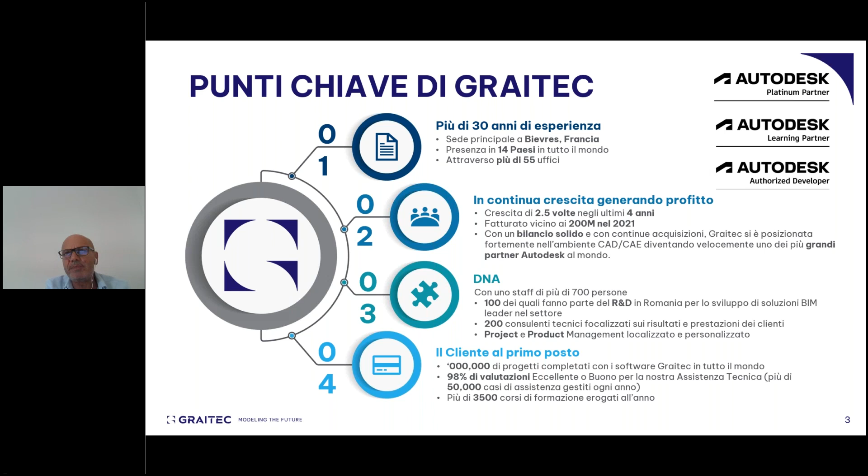Questo grazie a uno staff di oltre 700 persone, un po' diffuse in tutte le filiali al mondo, ma la cosa interessante, c'è una struttura centralizzata in Romania che si occupa esclusivamente di ricerca e sviluppo. Quindi, come dicevamo, presenza globale, presenti in Nord America, negli Stati Uniti, in Canada, una presenza europea, Europa dell'Est, precedentemente anche Federazione Russa, oggi non più. Per quanto riguarda l'Italia, il quartier generale di Graitec Italia è a Venezia, in provincia di Venezia, con filiali Milano, Roma, Napoli e Bari, con un modello di business che possiamo dire basato su 3 pilastri fondamentali: quello che noi

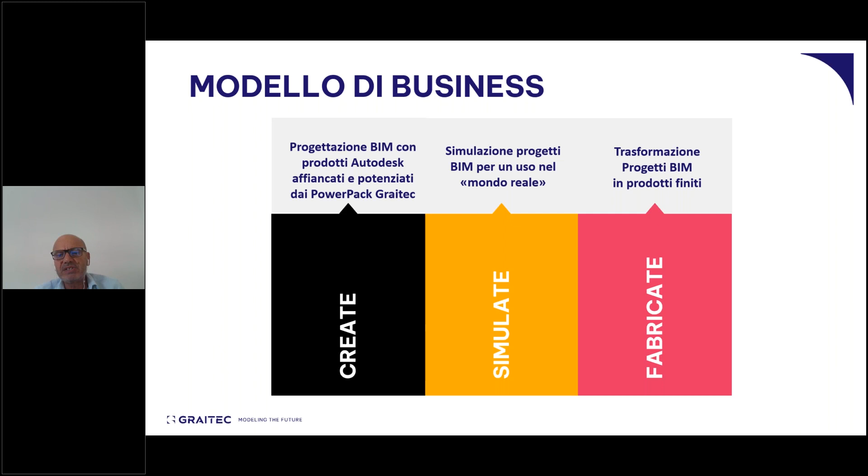chiamiamo il create, ovvero la progettazione con prodotti Autodesk, che poi sono affiancati e potenziati dai PowerPack di Graitec. Il pilastro simulate per la simulazione di progetti per un uso come se fossimo nel mondo reale, e in questo caso parliamo di soluzioni per il calcolo strutturale, fino al pilastro Fabricate, ovvero la possibilità di andare a trasformare progetti in prodotti finiti.

Ed è proprio su quest'ultimo pilastro che possiamo far rientrare Structsoft Solution, il braccio operativo del gruppo Graitec, che è specializzata in soluzioni di BIM framing, che possono seguire il flusso di lavoro integralmente, dalla progettazione fino alla produzione. Structsoft nasce nel 1994 in Canada, a Montreal. Rilascia il software MWF, che è il software basato su Revit per il Wood and Light Steel Framing, nel 2008, che poi sarà un po' anche il tema della giornata.

Nel 2013 Structsoft stabilisce una sua presenza europea con uffici a Liverpool in UK, da dove al momento poi è collegato l'altro mio collega Ben Locke, che seguirà la mia presentazione, fino al 2021, dove il gruppo Graitec acquista Structsoft Solution e quindi entra a far parte del gruppo Graitec.

Ma veniamo un attimino al tema della giornata. Perché un webinar proprio sul BIM per le costruzioni a secco? Bene, le costruzioni a secco si presentano un po' come una moderna alternativa a quelle che sono le comuni strutture in laterocemento, partendo da processi produttivi industrializzati, tipicamente off-site, per applicazioni sia in settori specifici, come possono essere ospedali, alberghi, retail, fino anche a quelle che sono le costruzioni ad utilizzo civile.

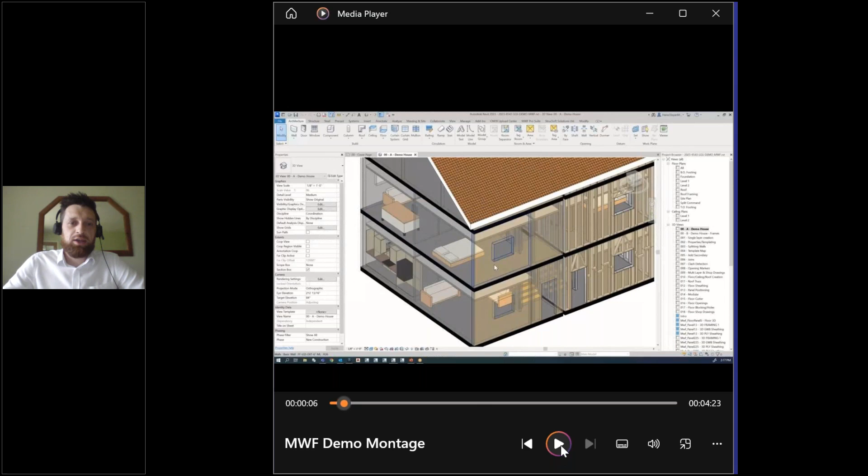So what we're looking at here is a generic model in Revit. One side, which you can see here, has already been framed, and the other side has not. So what we're going to do here is just show you how quickly and easily you could effectively frame an entire project using MWF. The members here that you can see framed are normal Revit families, so they can be modified, and you can of course create and import your own.

So what we can see here is the left-hand side of this building, this small residential development, has not been framed. So we have highlighted these walls, and we're going to frame those using the quick create tool. This is matching Revit wall types with framing types that we have dictated, so that it will frame it as we expect in a templated manner.

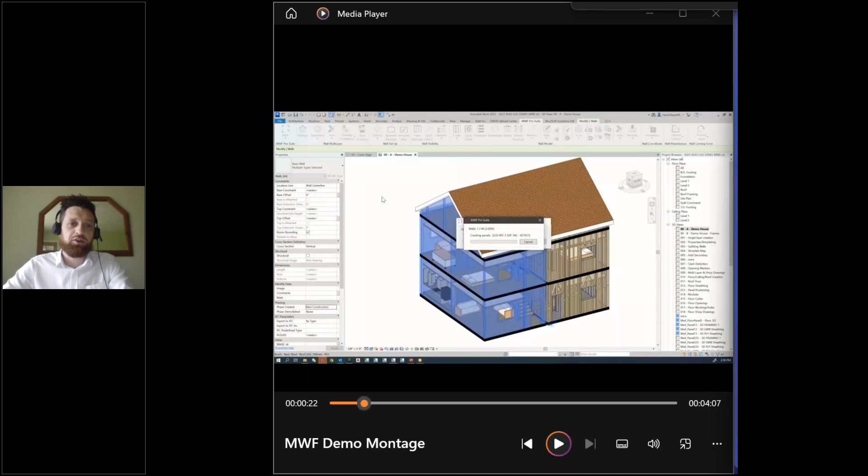So this is while that happens. This has been sped up just to keep this video nice and concise. We didn't want to do an hour or so demonstration of the software in depth.

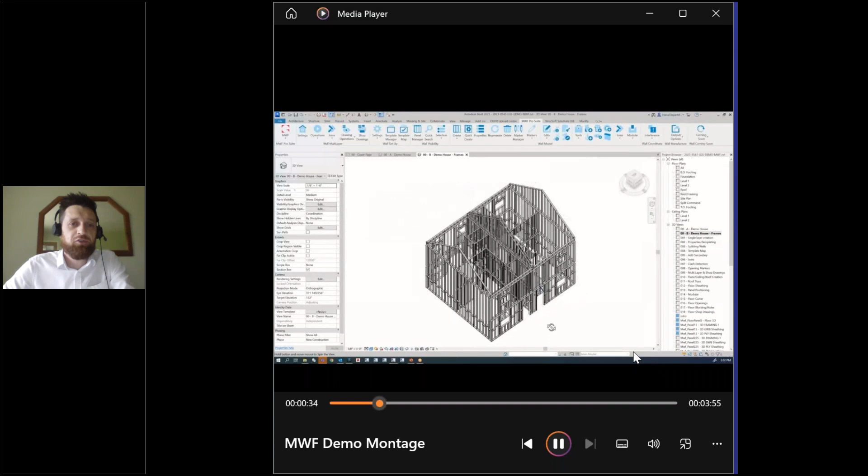As you can see, automatically with a click of one button, it's framed the left side of that project. Now what we're going to do is take away some of the views so you can see just the framing elements. What's important to notice is that whilst the entire project has been framed, not all the walls have been framed the same. On the ground floor we have vertical studs with staggered horizontals, whereas on the first floor we do not have any horizontals. We have different header configurations for the windows on the first floor versus the ground floor, etc.

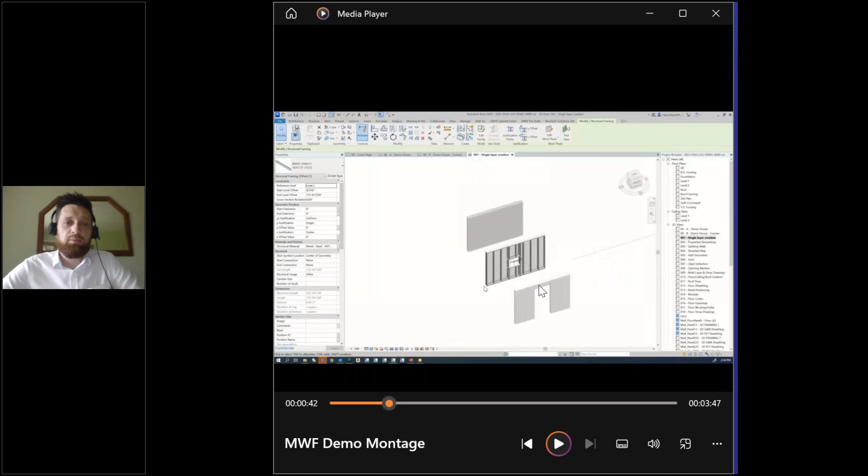So effectively what that means is you can create a whole project very quickly. Imagine the difference that makes versus framing that project manually. It matches up wall types with the templates we've suggested and frames them accordingly, taking into account joins, openings, etc.

The next thing I wanted to talk about is how well MWF copes with things like design changes. So here we have three basic walls. You can see one has been framed already. This middle one, what we're going to do is show you how it copes with changes.

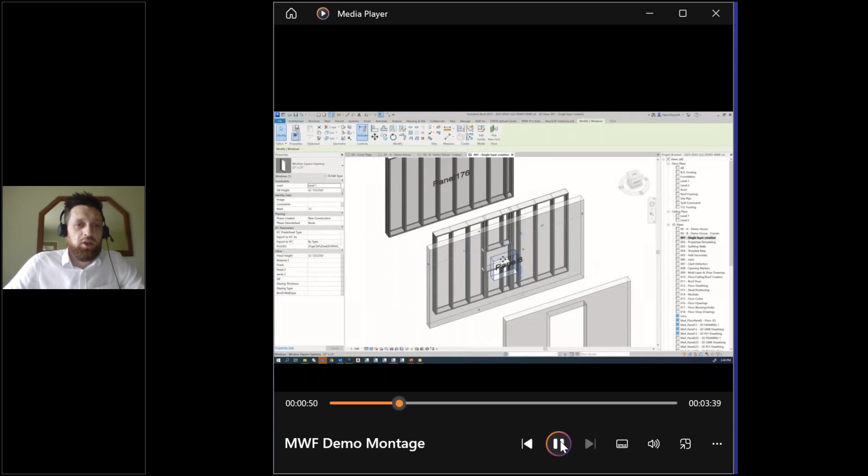We've changed the length of that wall slightly. We're also going to move the position of that wall. The window opening has moved, and actually the wall has changed shape entirely. We all know design changes come in sometimes when we're halfway through a project, and that can be quite frustrating and involve a lot of reworking.

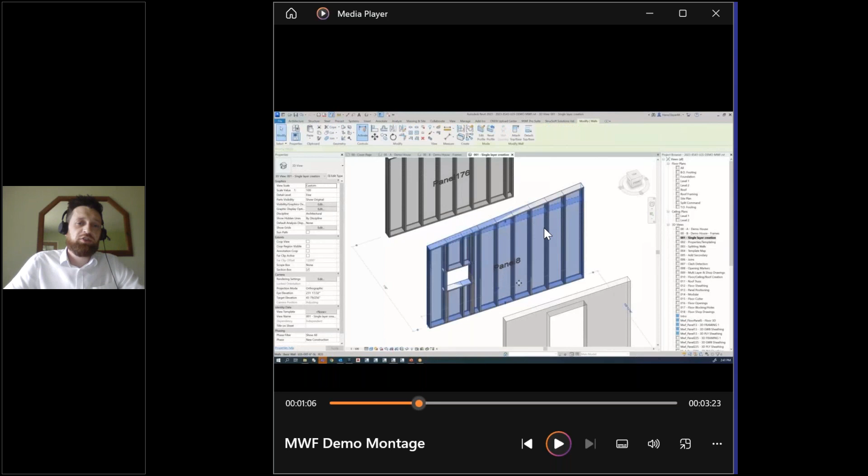In this case, as you'll see, all of those changes have been made to the wall. We simply regenerate that panel, and MWF will reframe that wall, taking into account all of those design changes that have been made. So it's now a different shape, a different size, a different position, and the opening has been moved.

MWF works really well with all the opening types within Revit, to be honest. What we can also do here is add a door opening. Just hit regenerate, and that shows again how quickly and easily it can cope with that change and addition.

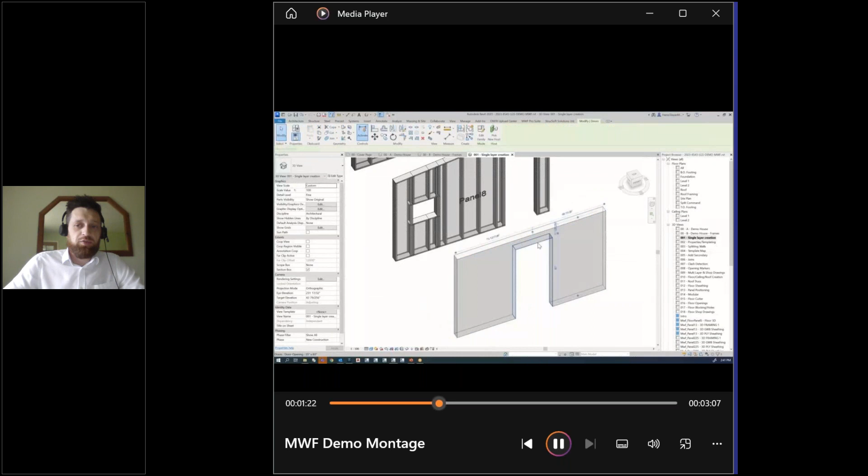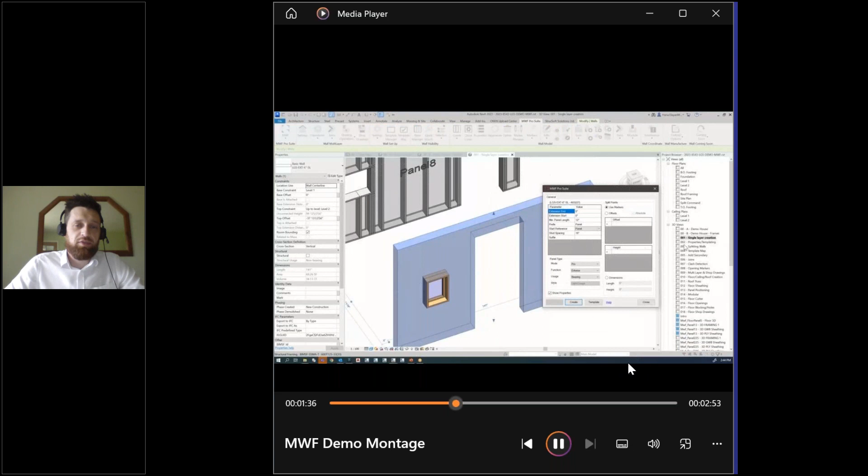We're going to look at that again for this one. Some of the openings are window openings, so we'll add a window to this wall, and we'll add another wall opening here as well, which could be a duct or a beam pocket, something similar. Obviously the need now is to frame around these, and as you can see, very quickly we will be able to frame around those openings automatically with the configuration we have selected. There we go, so that's nice and framed, again supporting that duct or beam pocket.

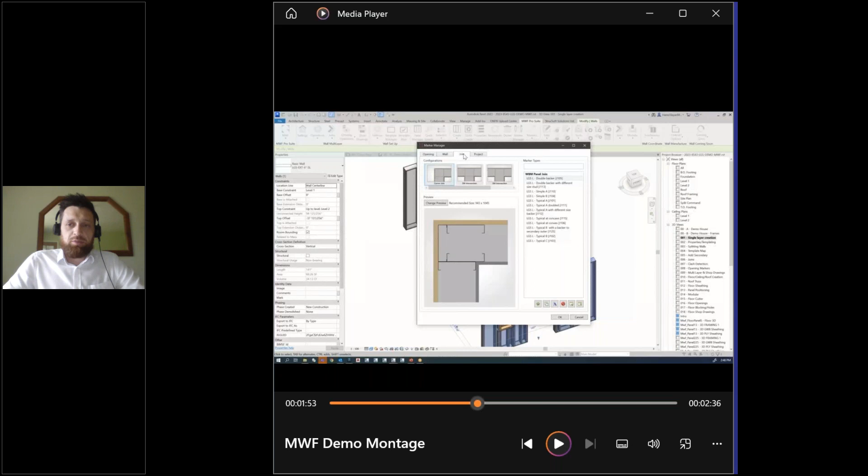What we're now looking at is some of the templates. This is how you're going to apply a template to frame a wall. It's also showing the joint conditions and some of the opening conditions here - you see different headers, different bracing, etc.

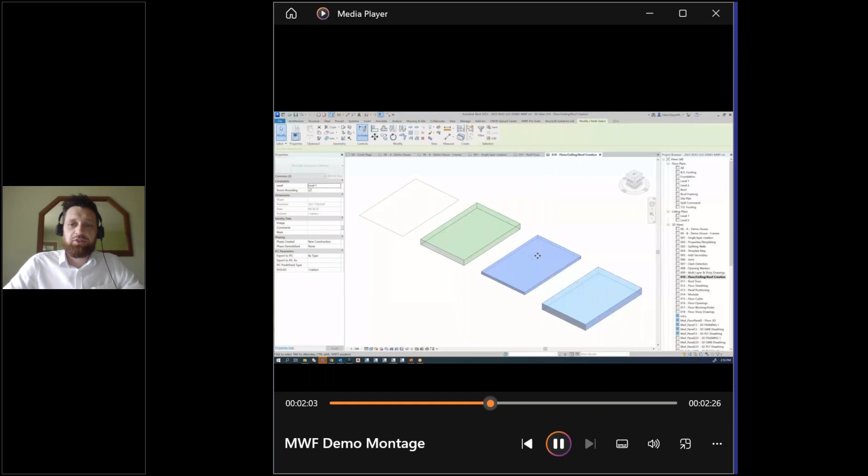MWF also comes with other modules for floors and roofs as well as walls. So you can do ordinary floor cassettes or alternatively truss configurations. This is going to show you the very same principle - it will frame floors, cassettes, and create trusses as well.

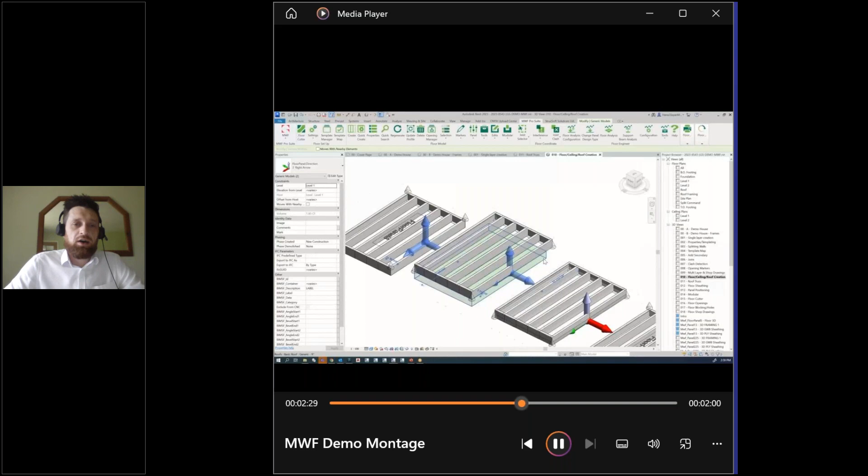Now the next thing we're going to look at - we've looked at how we apply a template, sorry - is how you would create a template to then apply to different parts of your project.

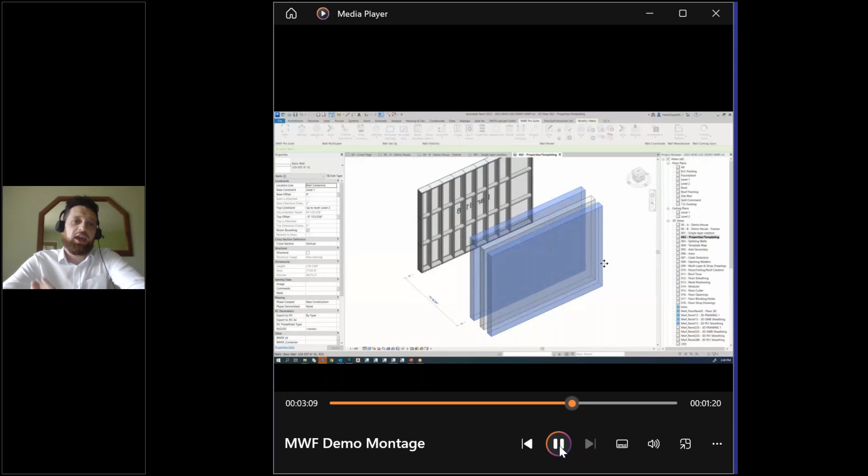So here we have two walls. We're going to create some vertical studs on this first wall, as you can see, and then we're going to add some horizontals to that as well. We've replicated another plain wall down here three times, and we're then going to just use the template we've created for those settings to reframe these three walls as well, showing you how easy it is to duplicate and use the same settings across your project. As you can see, three more panels created with exactly the same framing conditions and setups.

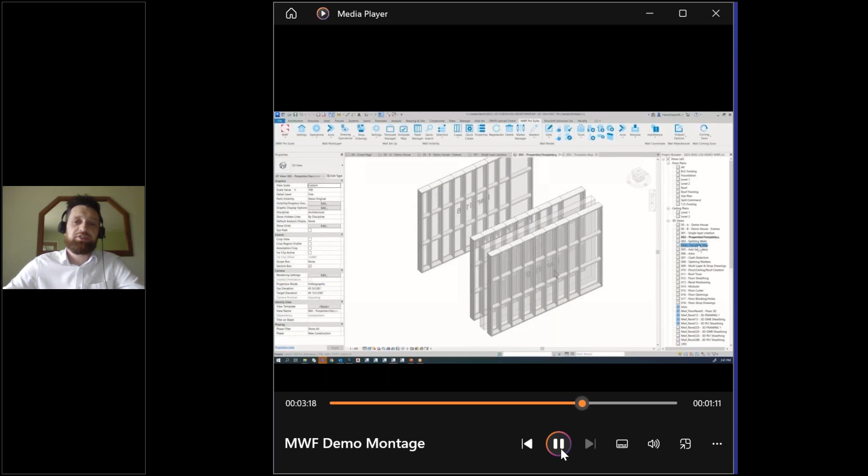As with the first example I showed, this demonstrates how easy it is to frame walls simultaneously that have very different characteristics. We've got 3 walls here, we're going to highlight them all and quick create. This maps our template, mapping wall types and framing styles to the walls we can see here, giving us 3 very different configurations.

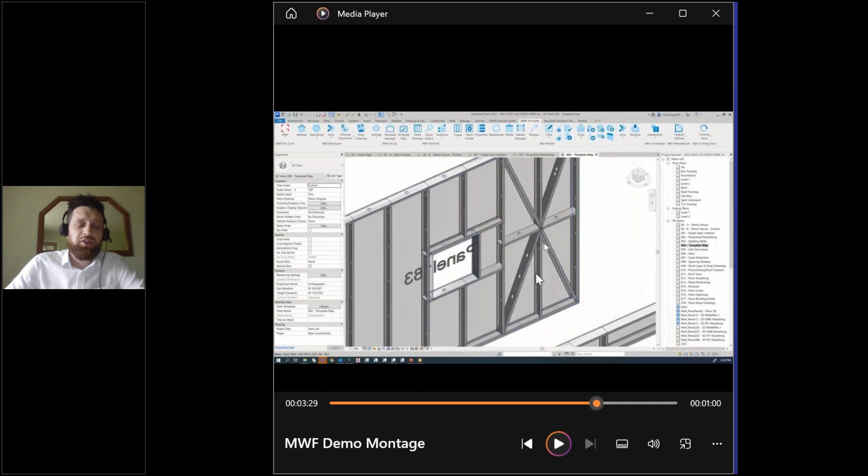The first wall here includes some holes - could be for MEP, for services, for pipe work, or anything like that really, all user defined, and you can select exactly where these would appear. This one has also got some X-bracing on the side of the panel, and this one has staggered horizontals with clips. We also have tie downs that you can put in as well, all configured automatically with templates.

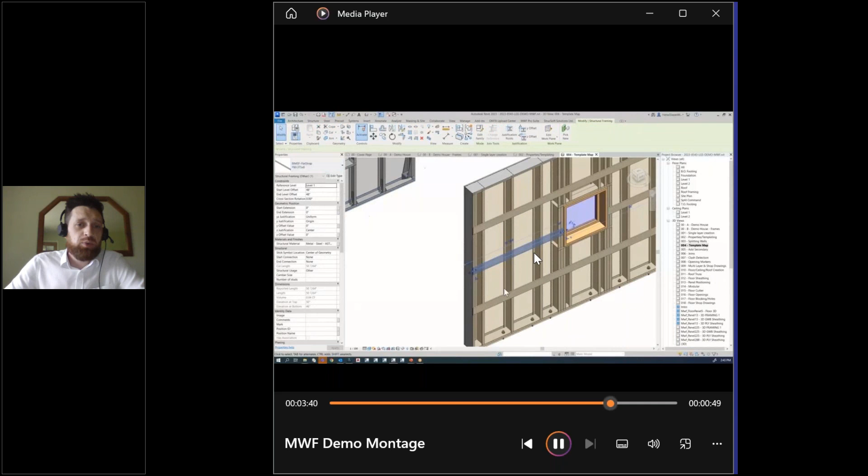And this one, as well as the additional anchor bolts, has horizontal furring on it as well. Hopefully that shows you how easy, with a click of one button, you could frame very different walls with very different characteristics throughout your project.

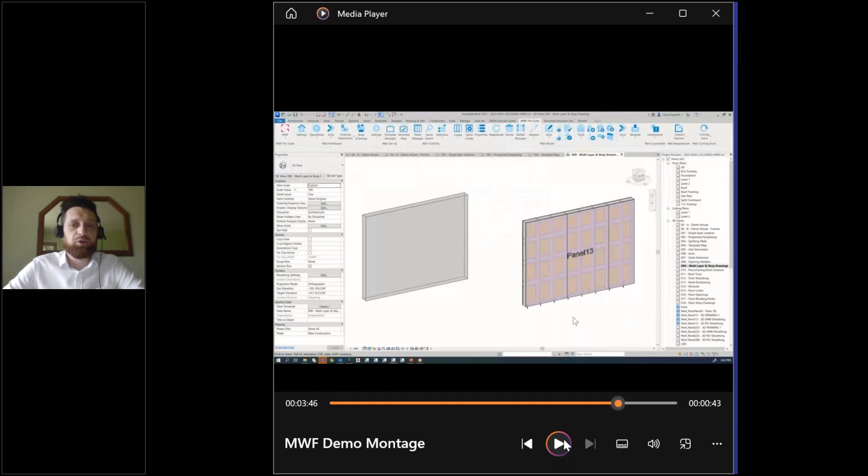MWF is also great with other wall layers and sheathing layers, because it's not just the framing we need to do - there will be lots of other layers. This could be OSB, plasterboard, plywood, any of your finishing layers really. MWF will also automate the placement of these boards. On the first side of the wall we could see that was vertically laid, and on the other horizontally - lots of options to configure and optimize however you wish.

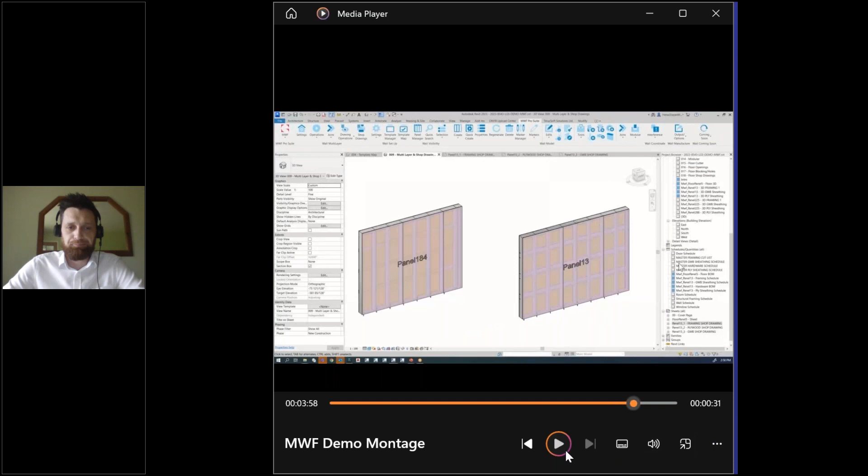Once you've finished these designs, one of the crucial parts of MWF is workshop drawings. These again are highly configurable, all user-defined. We can see here we have different views - a plan view, an elevation view, some schedules with cut lists, labels on the members, as well as dimensions. We can also include bills of materials, schedules, cut lists, with all the other clever things Revit will allow you to do.

With the benefit of being a Revit plugin, a lot of the other Revit features are still very usable, so you can create a lot of useful information and BOMs from this. What we can do with the models, once created in Revit and MWF, is export these to our CNC and production management tool called Onyx. Within the Onyx platform you can manage logistics, sequencing, stacking, and even get CNC machine files.

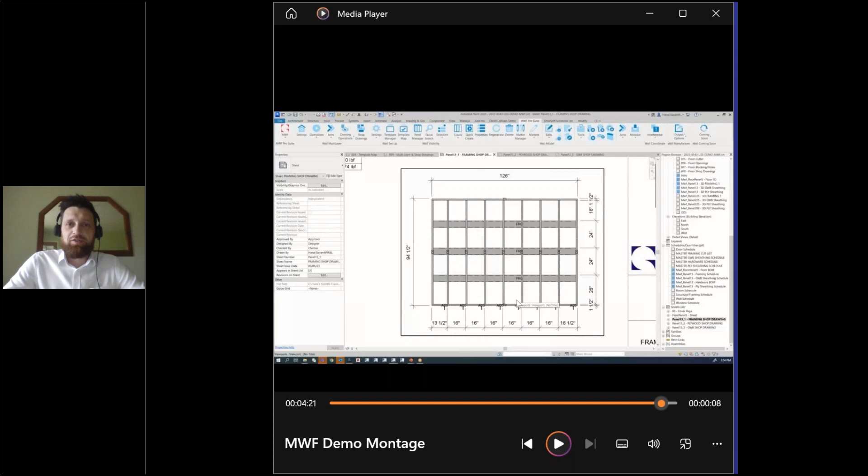We work with all of the main manufacturers, such as Howick, such as Scottsdale, and I'm sure you know the others - we're able to get files for those machines very easily. I appreciate that was a very quick demo, 5 minutes, to say we could go through this for hours. But anybody interested in looking at this in more detail, I'd be more than happy to support with extensive demonstrations. We can offer trials, and are happy to work on proof of concept projects, to look at how we can recreate your specific design details.

That's all the time I wanted to take up with you today. Hopefully I've talked slowly enough and not given too much detail - that shows how the product can be used at a basic level.

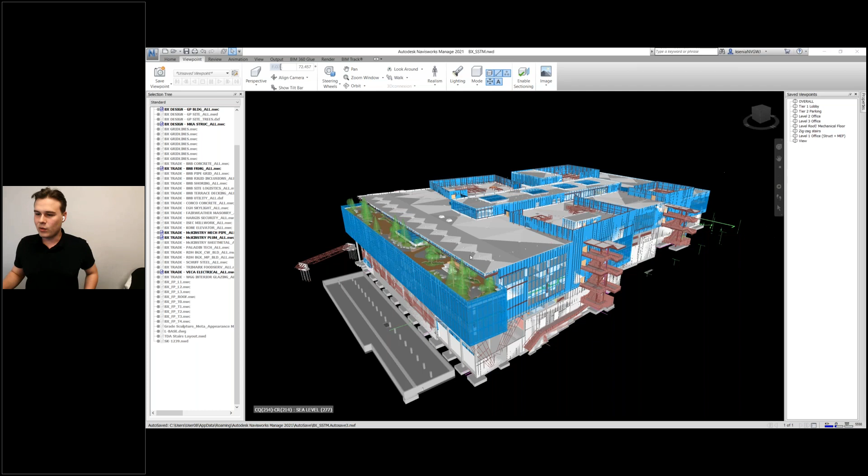I'm going to share my screen real quick on this building. It is pretty huge, wonderful, interesting forms. We have been using MWF since 2020 starting on this job, and of course everything redeveloped and readjusted to be extremely efficient.

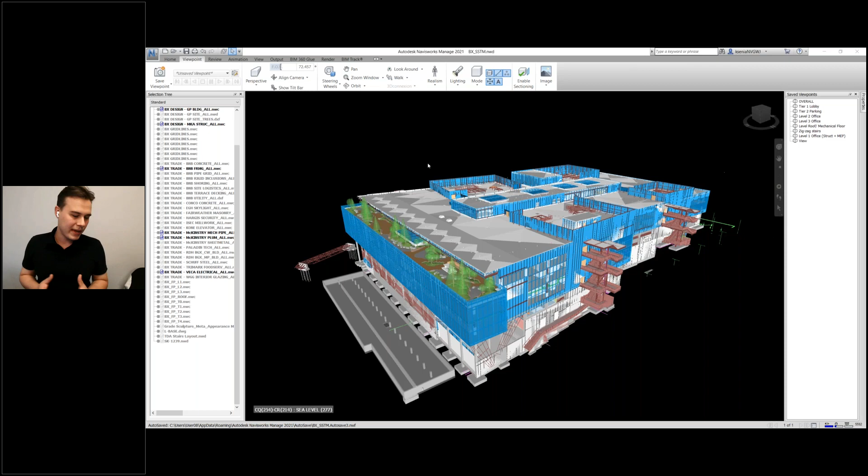This building particularly had, I think, about 3,200 panels that needed to be panelized and brought to site already prepared. The main idea was that you would actually do the coordination ahead of the montage. Let me share real quick here on some of these panels.

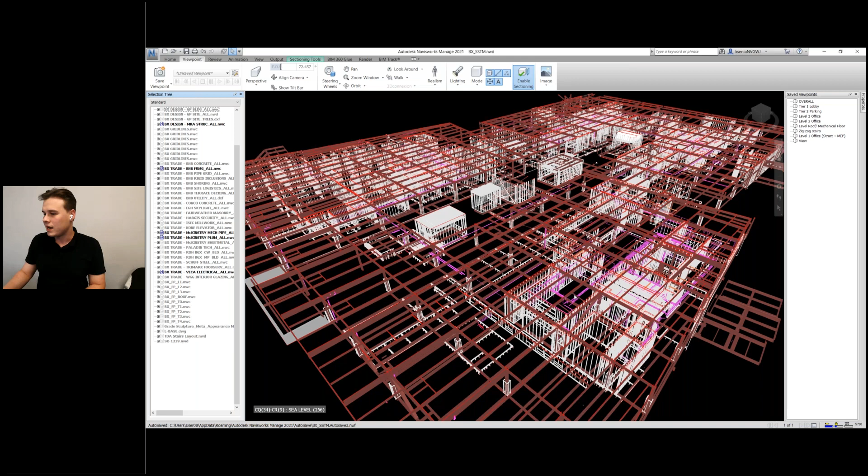So here's all the meat around the bones. You can see right here that there are a lot of different services happening, a lot of electrical, and all of this was actually coordinated to the extent of what was needed for the construction.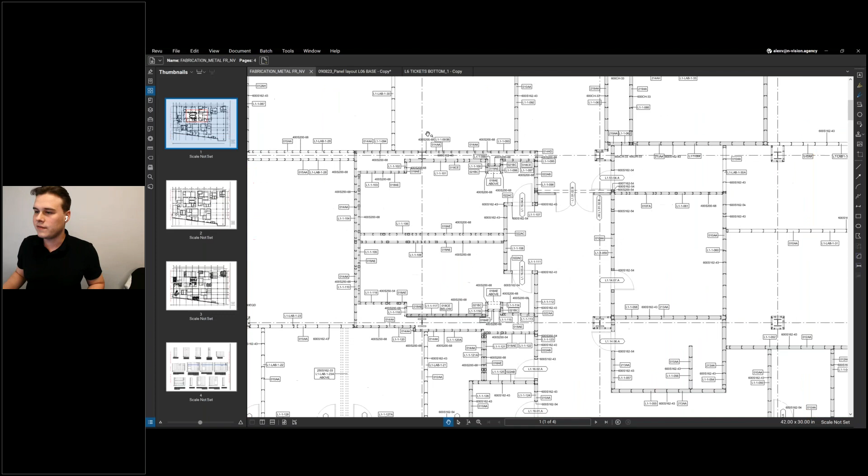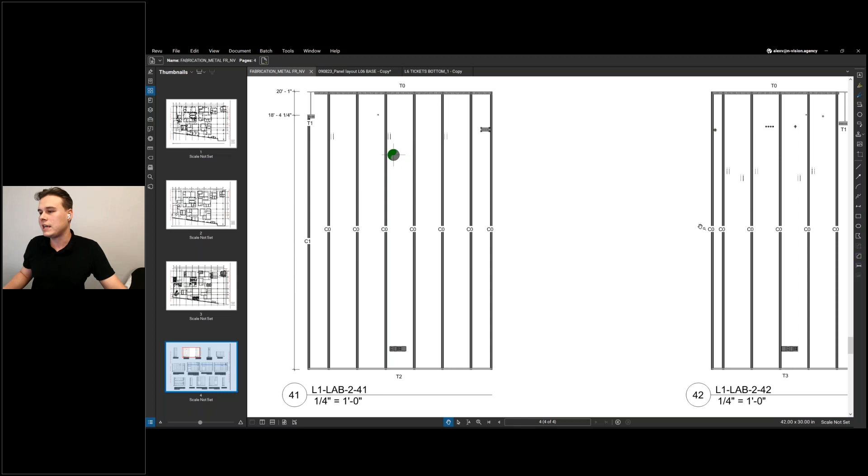Once everything is done and the engineering is approved, we produce the shop drawings laid out on the floor plans. Typically, we assign a floor plan, the wall panel number referring to the level, then the number of the quadrant, and so on. The idea is to link this number to the elevations and coordinate around the MEP systems, which is, I'd say, the most common thing that would destroy your project budget if you don't take care of it beforehand.

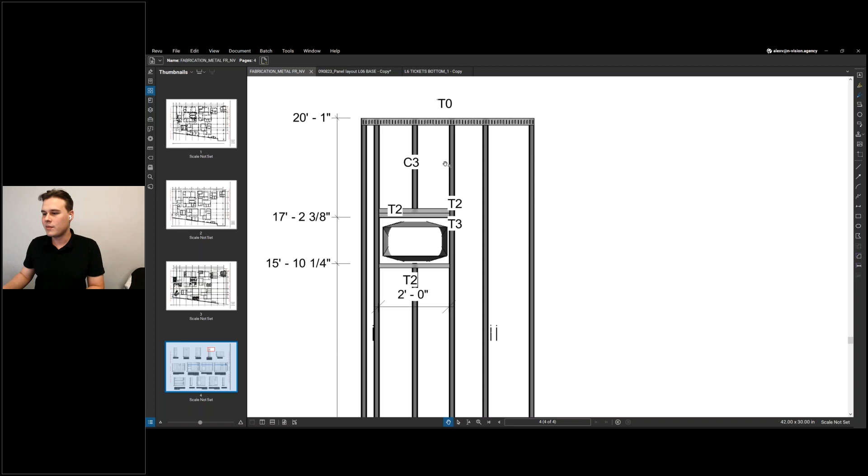Jobs that are not using clash coordination are already losing at least 40% in change orders that happen in the field. But with using MWF, the subcontractors are able to save even more, because not everybody is modeling the framing. This is the major problem, especially with the systems running in the actual wall.

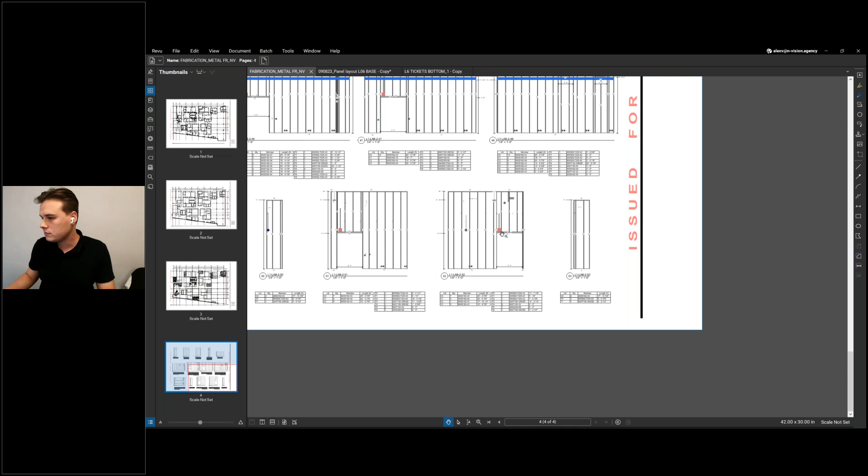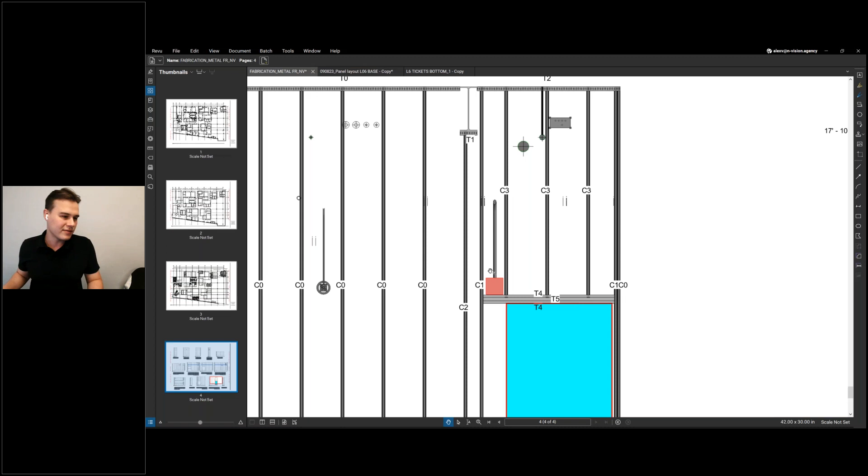I'm going to show you an example of why it's important. For example, there's a door that is this wide, and whenever you have a door, you need a king stud running from bottom to top. If you have a system there, like this junction box, you would be hitting that. In these cases, if you multiply it by 3,500 walls, you'll have so many problems, which just snowball.

I'm going to show you an example of one of the clashes that could happen in the field. So here's our ceiling, and we have an HVAC duct running through that.

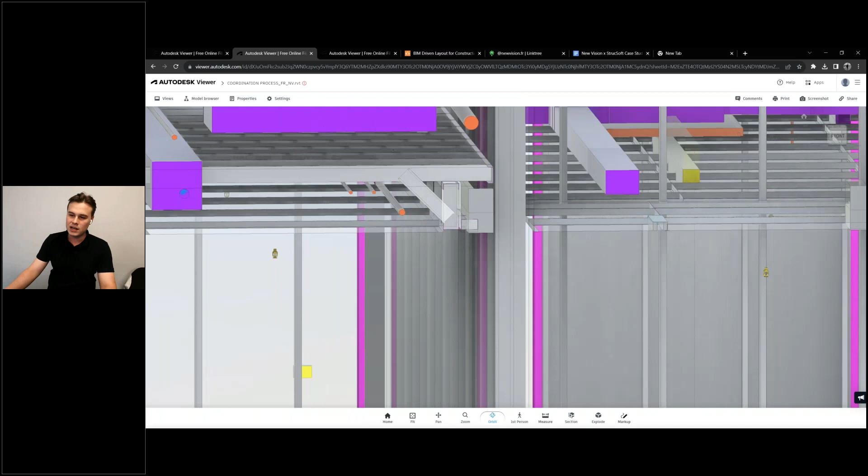That's a major problem, it is a design issue, and this caused a lot of rework. This is one of the Apple jobs, which is to remain nameless, but it is an example of that clash issue.

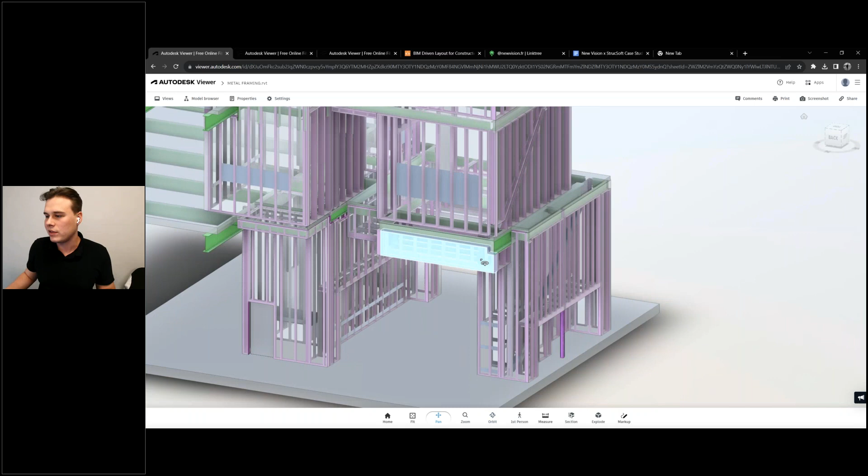We've been using MWF not only for regular framing, but also for some design decisions. For example, if you have a lot of systems happening, it is able to frame around those bracings and actually save so much time. I would probably be crying if I had to do that manually.

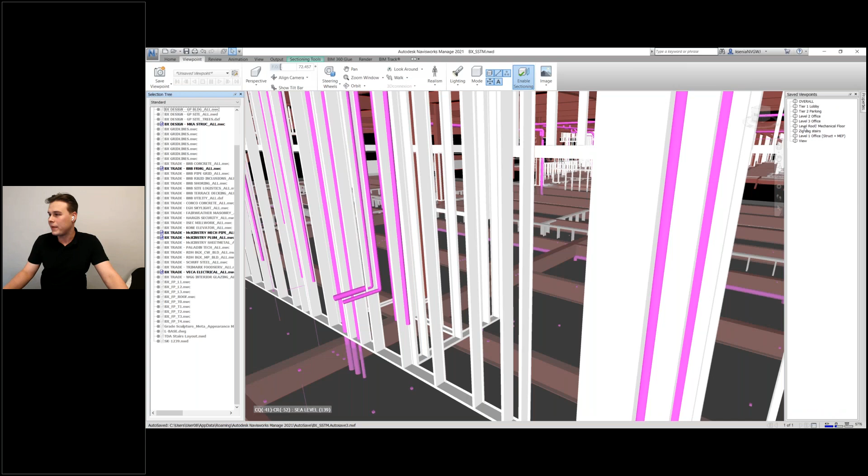We've actually tried to estimate that. If we could complete the building of Meta just by doing that manually, I would say it would take more than 5 hours per each wall. Typically on US jobs, you have coordination changes that happen every day, and reframing things would take hundreds of hours, and human mistake would be the major issue.

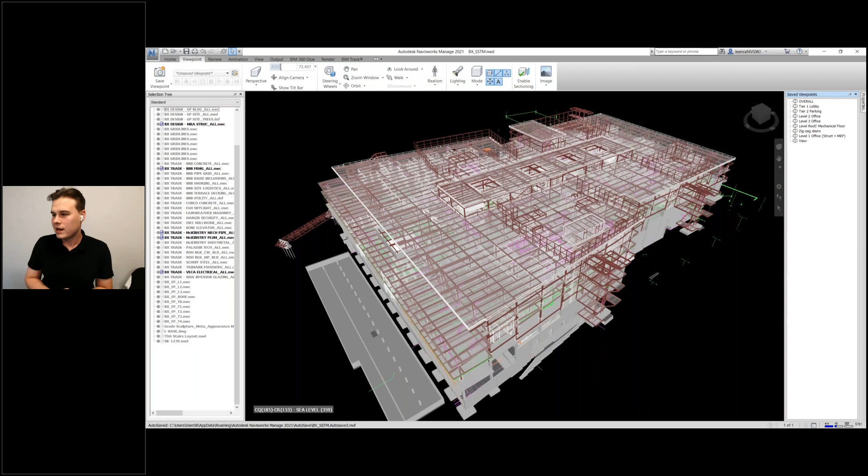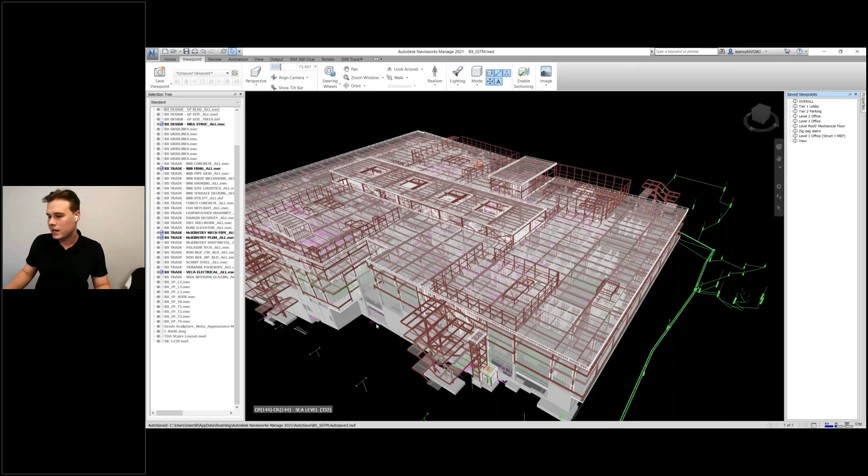As far as the shop drawings, this is the major thing that happened to this building. Technically, this particular building took 250 sheets to produce, but we are using the MWF tool right now on one of the newer jobs. Let me show you really quickly how it's done.

You can see the application of having the actual list of materials under each wall, so that you can bring it offsite, fabricate it, estimate the amount of money you want to spend, and order it ahead of time. The best case scenario is if we do everything automatic, and this was the case study we just completed.

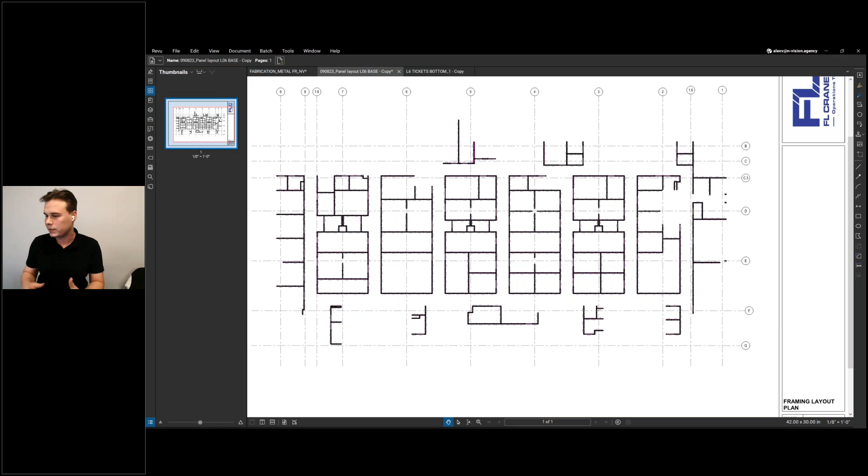It is done, it was done on September 8th, and it was completed in one week. We have completed more than 694 panels, which is much better, because the previous building I showed you took, I think, since 2020 to build, produce, and design — a year and a half. So in 3 years, I would say MWF has increased the efficiency and the abilities to do this.

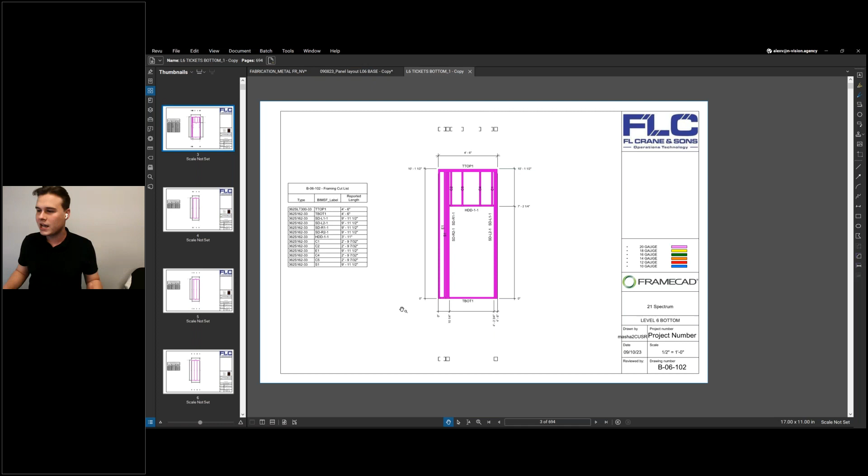Whatever you see on the screen right now is all automatic. There is basically minimal input from the detailers and designers to make sure everything is up to par and up to standards of the engineering on the type of stud. You can see all of this.

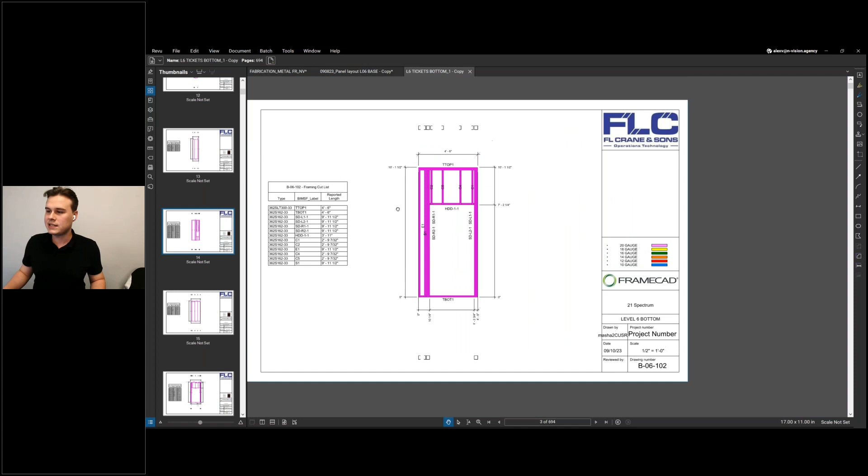One of the most interesting things is that whatever is framed with MWF can actually be used to do the robotic layouts on a field. I'm going to show you a quick example of this right now.

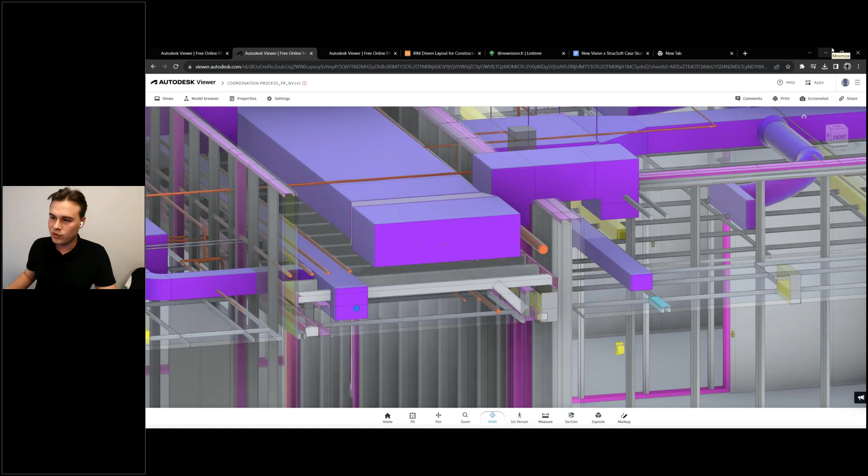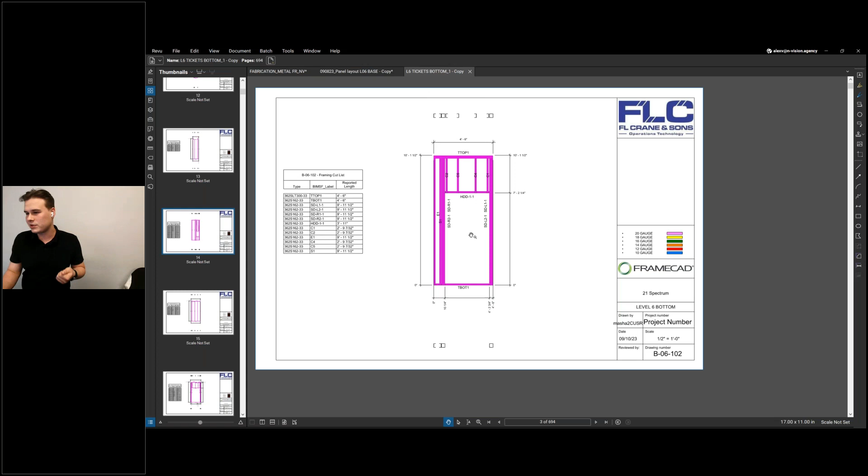Whenever you have the information about the size of a truck and the amount of those trucks, you would be able to efficiently stack them in proper places on the field, so that your workers could just come in, take this particular panel that is pre-manufactured, and put it into place, which is pretty interesting.

I want to do that. I'm going to let everybody know once we submit it and if it works well. But I do believe it's a wonderful solution.

I would say that I have a little video to also illustrate how we typically use MWF on the MEP coordination. Here it is — it's pretty short and explains wonderfully.

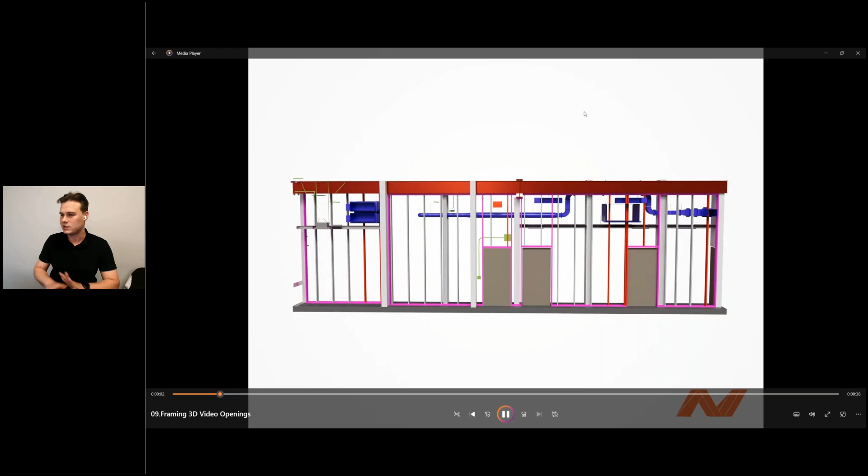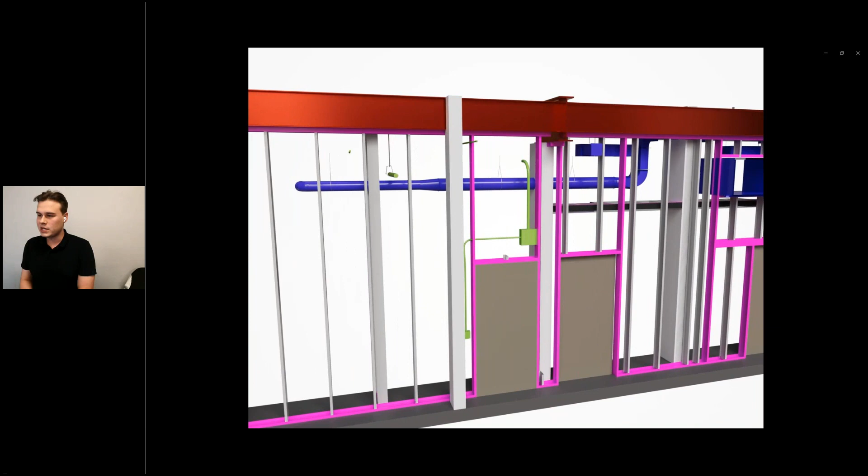Whenever you have the systems, there are different types of tolerance that you would take. US jobs are a little bit different than European — European would have a little bit less electrical conduits involved, and there will be fewer problems with the flex ducts. But at the same time, it's important to think ahead about the primary electrical runs getting into the building, and to create the openings for this. You can see that.

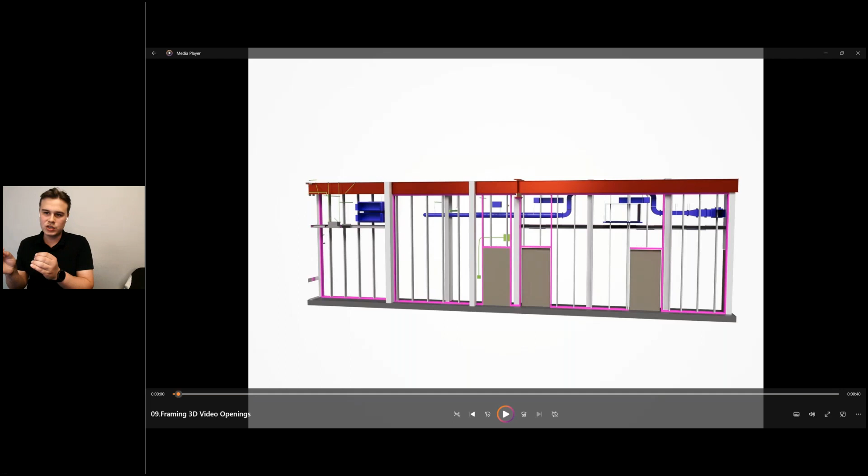So whenever we have MWF, of course it does everything automatically, but there is a really nice solution that allows you to plan ahead the spacing of the panels.

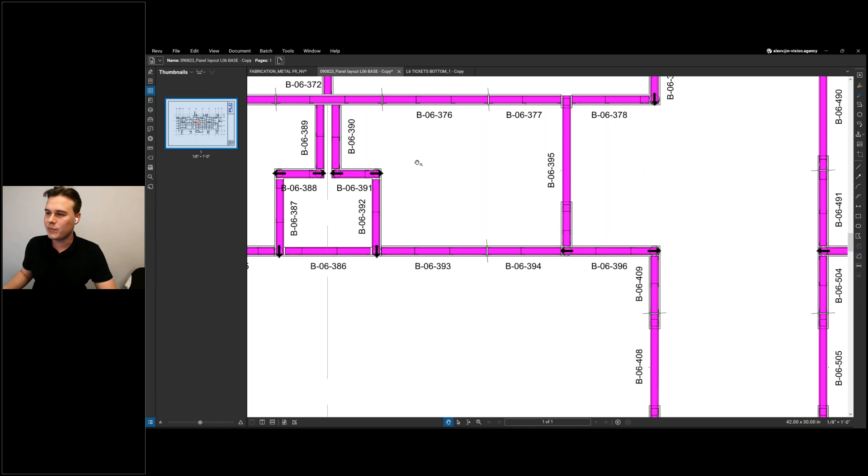I'm going to show an example right here. You can see that some of the panels are cut into place, first of all for logistics. Secondly, there are control joints that need to happen to avoid the deflection of the panels, and many more requirements for this, which again is done all automatically.

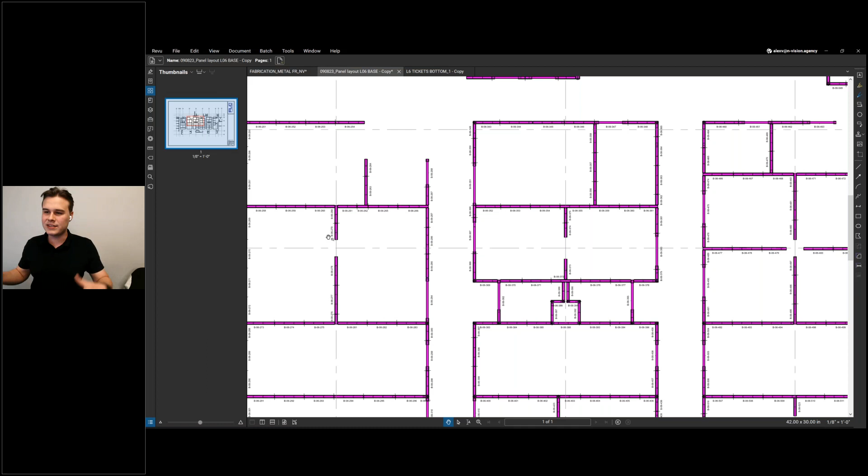I think I have everything explained and discussed, and if there are any questions, it would be wonderful to address them, because MWF is able to produce not only walls, we've done ceilings, we've done floors, we've done whatever you would imagine. Trying to use this tool not just 100% but 150% would actually help you do design solutions that are weird, interesting and unconventional.

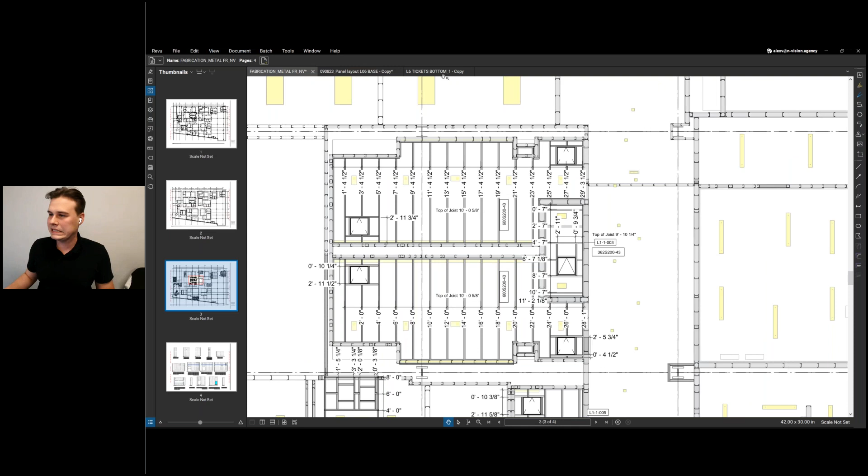But this is a wonderful tool. I would say we've been saving in a ballpark of at least 10 times more time on producing these framing elements, which is a wonderful example of efficiency. And I cannot explain how many things you can do with naming, numbering and labeling, which is all wonderful.

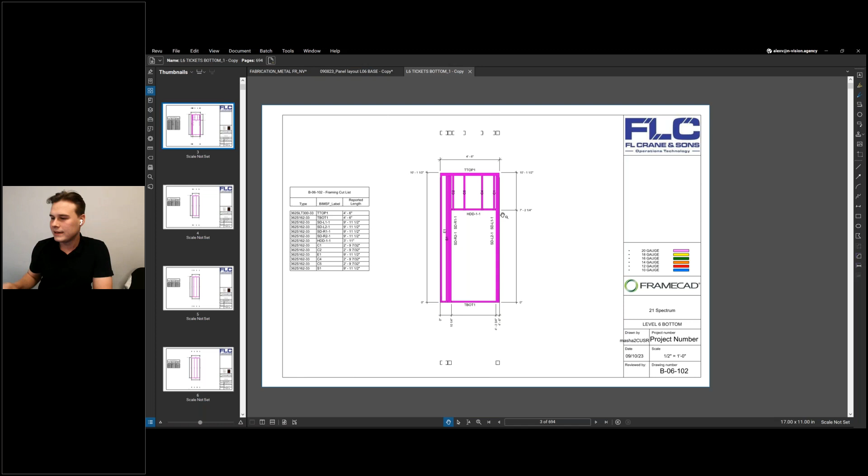I think I'm done. In case you have any questions, here's the contact information you can use to reach me or our director of client success. Please go ahead, if you have questions about MWF and real applications of doing things, I'll definitely be happy to answer.

Most of the GCs around North America use it, and even if you don't fabricate the walls, it is good to spend 200 hours or 100 hours on big commercial buildings that have at least 600 panels on each floor. It would be a good deal.

Thank you. Thank you. Thank you, Alex.